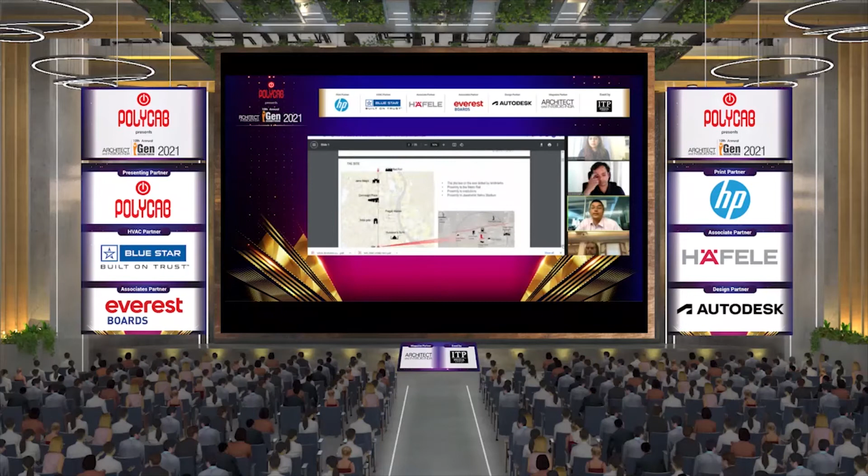So just hold on a second. This was named after the ex-Prime Minister - it's called Atal Akshay Urja Bhavan, spread across 2.76 acres. They wanted, like any other client, an iconic landmark. And the brief given to us, because it was the renewable energy headquarters, was to achieve net zero and go beyond it. The site was strategically located - it was wonderful to bag a project in the capital of this country, dotted by landmarks, in proximity to the metro rail, to institutions, and very close to the Jawaharlal Nehru Stadium.

So we hypothetically created an axis where it stood, and we did a SWOT analysis of the site. The unfortunate part was it was along the north-south axis, so there was a huge western orientation that we had to tackle. We had a very small sliver of the site hugging the main road, but we had a subsidiary road on the southern side. Great location though, with proximity to public transport, so I could really do wonders using public transport and thereby reducing the parking for the facility. The threats, of course, in Delhi were pollution and security, being a government building. An opportunity was that this was the second net zero building in Delhi - the first was a net zero building, and this would be net zero plus if it becomes energy positive, and we are confident that we will achieve it.

It will be the first one of its kind in Delhi.

What we did as a simple strategy was, how did we evolve the planning. So we wanted to celebrate the frontage, we wanted to create a public edge. What we then did is we established the footprint, and then we created an atrium.

There were two distinct departments sitting in this space. We got the building tilted to the geometry, which gave a great northeast light, and we wanted to enhance the entry experience rather than having a right angle entry—we wanted an angular entry. Then we shielded the west by introducing the service core.

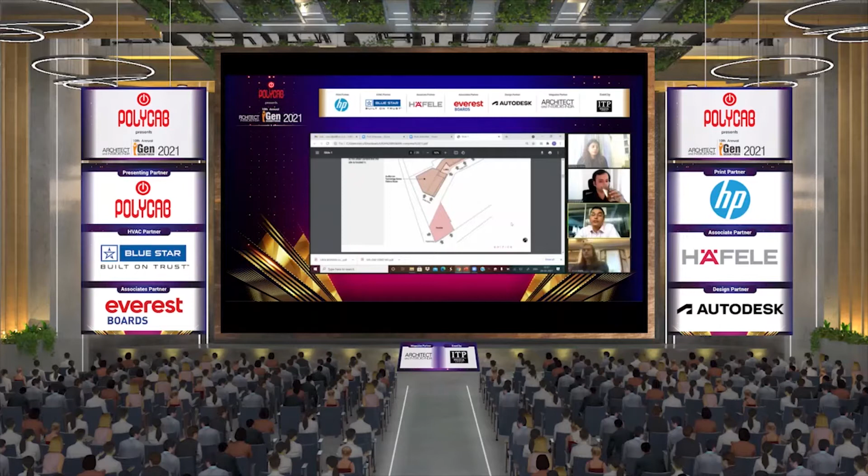We also created a public edge, a pavilion to showcase what the Ministry of Renewable Energy was doing on a week-on-week or month-on-month basis. The ground floor was the double height auditorium, and we took the canteen and gym on the first level.

The second level, we took the training facilities, that's your classrooms. They also had a requirement for guest houses. So the canteen spread across 2 floors.

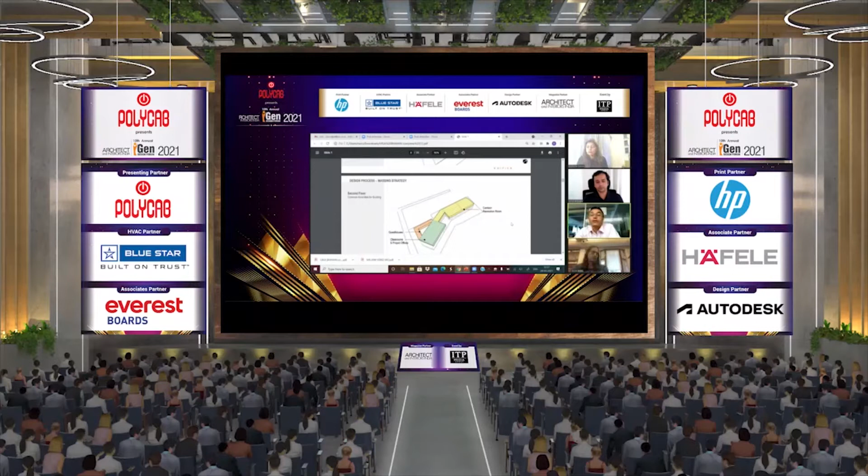Then we established the main service core, the circulation cores, which came as a vertical mass in the hinge in the center. This being in Delhi, we had to take care of the western facade.

So we created the core, the toilet blocks, the AHUs, etc., as a screen. But we also had to celebrate the wind movement there, so we created voids which allowed for light and ventilation, and allowed some cross ventilation for the atrium we had created.

Then we had these typical floors from 3rd to 6th floors, which had the grades in the government—A, B, and C grade offices. These were all typical floors.

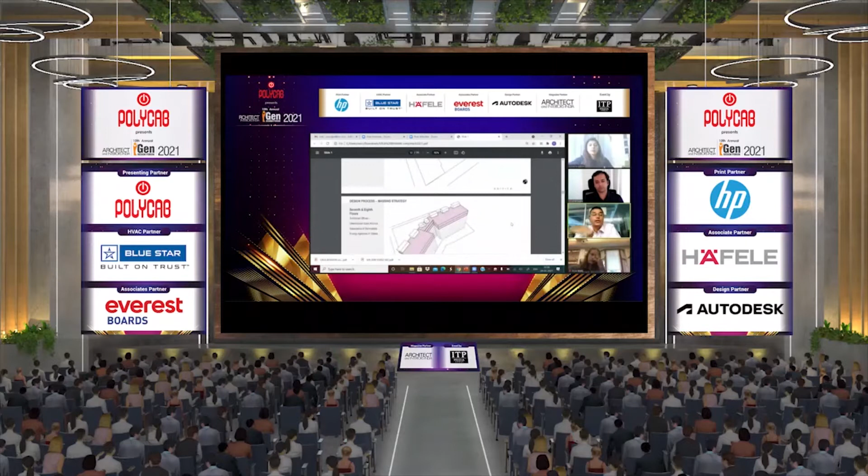The topmost floor was reserved for the minister. One side was the minister's, and the other side was for the Minister of State. So that was reserved for the top level.

What we then did as a strategy was, since we had to rely on renewable energy, we went in for solar panels, which we housed on the terrace floor on top. So this was a very simple strategy.

When we presented to the ministry, we wanted to make it completely idiot-proof. And that's how we showed the evolution of the design.

Then we had to think about the facade strategy. Since there was no building on the southern side in front, we were falling short of area for the solar panels, so we introduced a vertical solar strategy as well, which was called the solar well or the solar wall.

What it did was it took care of my energy needs, the solar wall as well as the rooftop strategy. And that was it—it had to belong to Delhi.

Therefore it had to belong to that circle, so we had to use materials sourced from in and around North India. Sandstone was used as a facade strategy, and the solar panels, you see them on top.

What we did for the eastern facade was we had to take care of the morning heat. So we had glazing, and then we introduced a kind of screen in front on which we started growing creepers, and therefore it kept the heat ingress low.

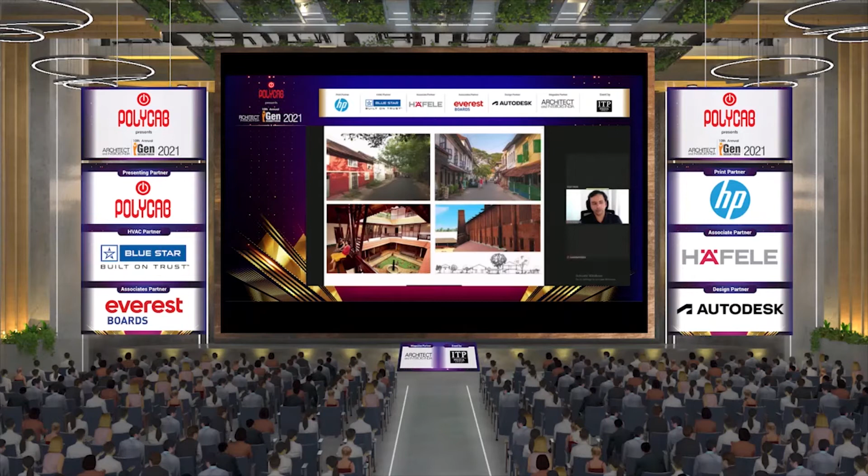So even if we look at these images and you can see the greenery, I would say the older architecture, the older built environments in these spaces all evolved in the shade of the trees. There was nothing tall. They worked with terracotta, mangalore tiles, brick, streets, courtyards - everything within the shade of the trees, ultimately building an environment that was sympathetic to the climate, and to the social patterns of that region.

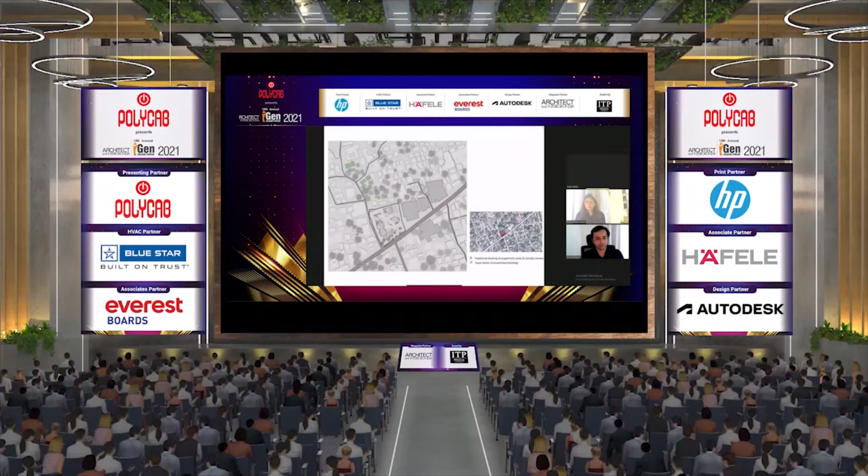So you're actually starting to see that all of the accumulated intelligence of the past, which are these loosely formed networks that allow sun and air and in-between spaces, are all now giving way to this kind of more generic concentrated super block. So the idea is can we look at the building program and start to, in essence, learn from the past and project into the future.

Now, all of this cannot happen in a vacuum. It requires a situation where all the stakeholders are also open to dialogue. The project is for Mathrubhumi, a very well-known media communications network. They do radio, they have an entertainment channel, they publish, they have an online presence.

So what they were basically looking to do in this project was to consolidate their global network - all of Kerala and Dubai, their sales and management structure - into a single site, whilst also keeping their local operations in Cochin, which requires a heavy daily interface with the city. So it's broken up into two parts: there's something which requires daily interface with the city, and there's something which is more of an oversight over their global program.

So what we did was we managed to isolate those two programs, and after numerous conversations with the client - seeing as ultimately how they're a communications company, and also the client is a member of parliament doing a lot of social work in this area - we distributed those areas in such a way that we kept their core daily program on the ground, and their global program into the trees. And what that did was it opened up a tremendous amount of...

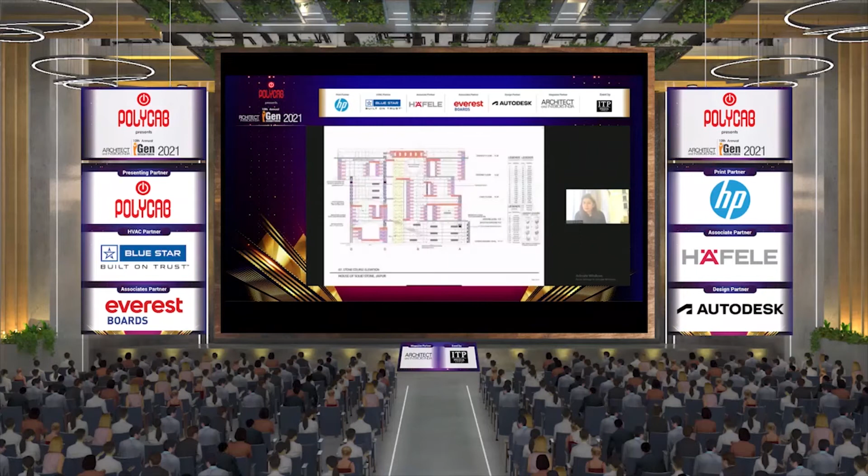I don't think place and access to technology is the issue here. In most places in India you're going to find very sophisticated construction technologies, but perhaps their application to different building types has been consigned to history simply because we haven't applied ourselves to the subject. So whether you're working with stones or bricks, rammed earth, bamboo or wood, it's really about taking global information networks and engineering from all across the world, but applying it to very robust local skill sets and local materials.

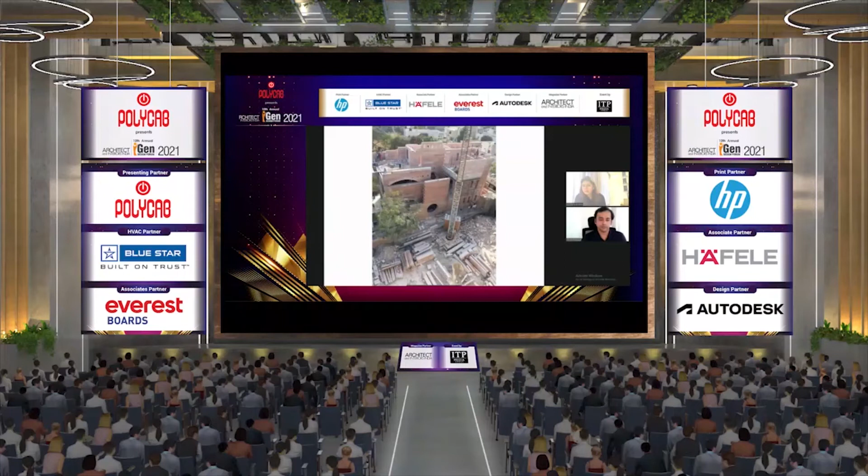And I think that's the issue of sustainability, Sumisha. Clients keep asking me about LEED ratings and stuff, and I always dismiss them because how do you evaluate the sustainability of simple construction with rammed earth and bamboo—passive design and core material components with pretty much zero carbon footprint—when all we're trying to do is apply metrics? I think this country has a history of immensely sustainable design, and it's our responsibility to learn from it. How we can apply it, whether it echoes the past or projects into the future.

A simple example: we've built a house with one material. It's a basement plus 3-level house built in solid stone, with the local village teams. The quarry is 15 minutes away. The stones are unprocessed—we've gone back to splitting stones instead of using those massive gang saws which eliminate all texture. But the reason we even chanced upon this process is for economic reasons. Building a house in solid stone in Rajasthan is actually cheaper than doing it in a concrete frame, brick infill, stone claddings, plastering, chasing, painting, and false ceilings. Here we have cavity walls, space for services, no applied textures, no false ceilings—everything built and cut by hand. You get a carbon footprint that is a fraction of what we'd call a conventional structure, with temperature performance of 8 to 10 degree differences between outside and inside—calling upon the past, but engineering it for the future.

Absolutely agree with you. In fact, I would love to see more and more of such projects, such architecture in our cities, because as you rightly pointed out, yes, a lot of people are building second homes which are very contextual, very traditional. People are looking at alternatives, people are going back to their roots. But I think our cities still need this kind of architecture within them too. Do you agree with me?

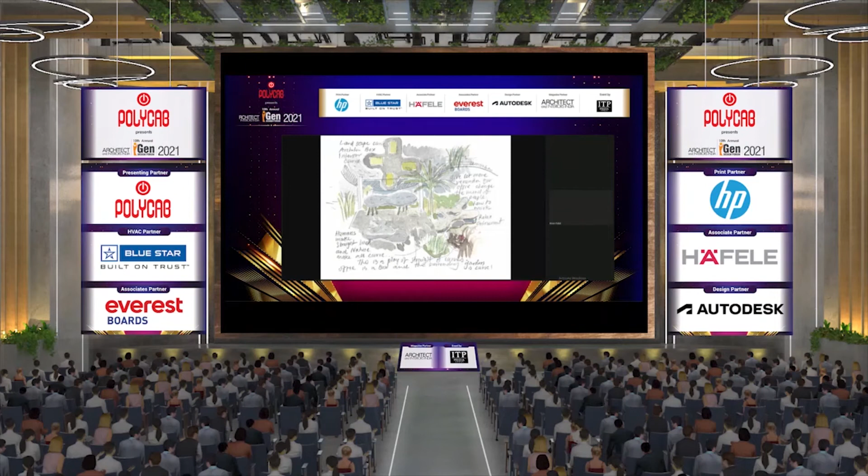In the sketch, you can see the 4 yellow cubes. Two are the office cabins for the directors, one is a conference room, and one area is for the staff to work on. So this is the office.

You can see one of the covered cubes, and on the right hand side is the open veranda kind of space. We created this curved form for the roof because we really wanted to not have a very powerful impact of architectural form, and wanted more focus on the landscaping. We thought we'd create the edges in such a way that it's least hurtful to the eyes - that's how the curved format of the roof came, with all white steel pillars and frameless glass all around.

That was incredible, Hiren. Yeah, so I think it's always good to go back and see how people use it. As a designer, you design something, you have lots of ideas, but you have to go back to the office and see, and you actually discover a lot more things.

Now these clients are very simple people, and I said, actually, don't become so greedy - keep your office like your office. Why don't you have an art show with some upcoming artists to showcase their work in your place? It will be wonderful, and I think we are also going to take that initiative.

This is quite early images. Now the garden around has completely grown so beautiful, and you are almost living into a forest kind of space. Surprisingly, they say whoever comes to our office for a 15-20 minute meeting ends up staying 1.5 to 2 hours because they love to be at this place, and everybody feels so calm to work here.

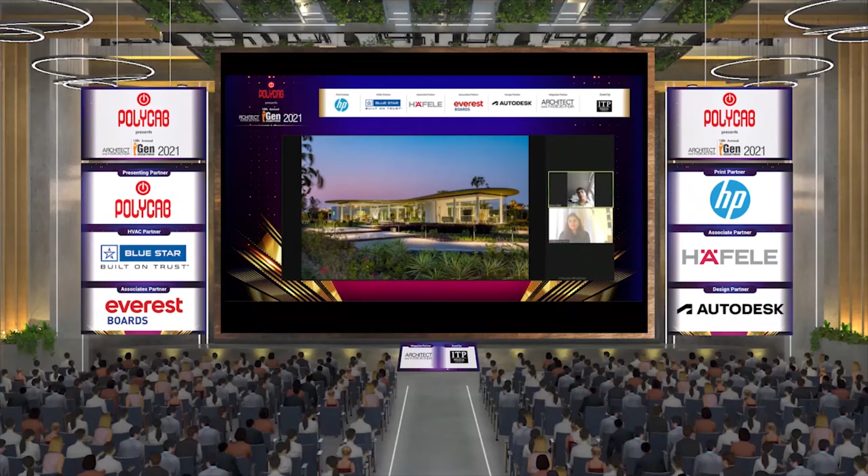Yeah, the idea was to create lots of beautiful garden around the building, which complements the building itself. So now, if I go back and see this, I really want... I mean, there is still an architect's mind working. I'm still in my next journey of architecture. I really want architecture without architecture, frankly speaking.

I'm just wondering, if I compare this, the water features and the pebbles here, with the water stream in the Himalayas, I think there is an ego of an architect. I really want to erase that and come out with architecture which is so subtle, and it's very difficult to find that kind of thing.

That kind of philosophy of design, I'm designing for my own learning. But yeah, it's a process, and one can maybe fail, but it's always good to just keep on working, and you discover new benchmarks in your life.

Next one, please. Yeah, so you see from inside also we have furniture pieces which have free form. It's all customized with local carpenters, nothing has been imported or something like that. Even the client would have afforded that, but we thought it would be good to have simple furniture. And if you see, the flooring is also very subtle and simple, with concrete flooring.

This is the conference room, and now the surrounding landscaping has already grown. I recently visited, and you don't see the movement all around the plot because the peripheral plantation has grown almost double than what you see now.

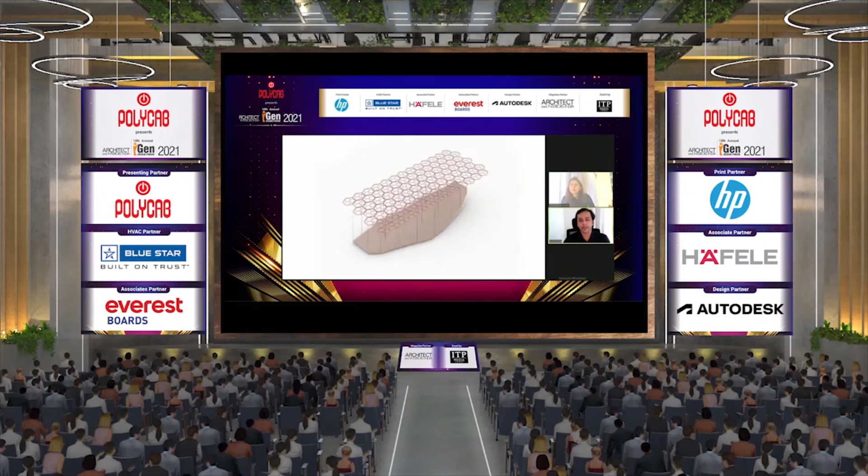So the first thing we did was look at the original contours of the site, and restructured the site again to the original contours. On this, we overlaid the hexagonal grid. We wanted to have a primary and secondary grid to control the architectural geometry. So it was a system overlaid on the entire site.

Then further, this inclined step - because the client has anyway cut the site, we are not reconstructing it by filling the earth back, because this would be very counterproductive. The architecture of the site is actually coming from the initial topography. So this inclined area is where the villas are sitting, around 8 or 9 villas nested in the inclined zone.

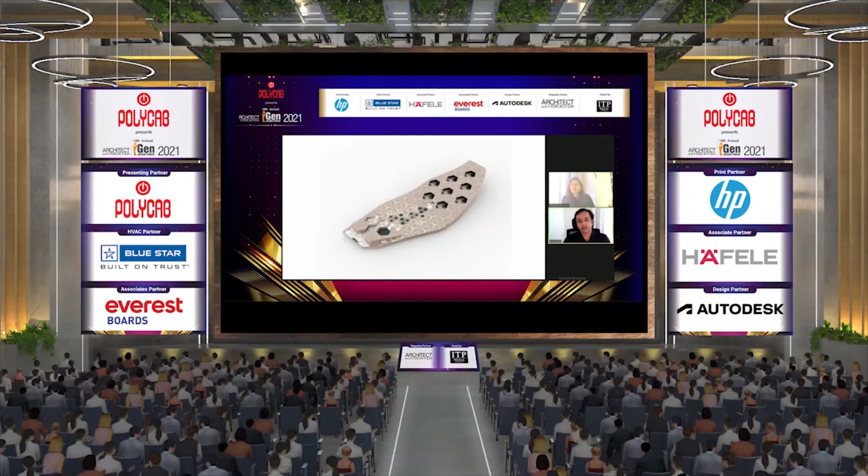At the entrance, we have 2 buildings - the reception plus all-day dining, and the gym cum spa. So this becomes the entire project. The idea here was to re-establish the site contours as they were, without actually filling.

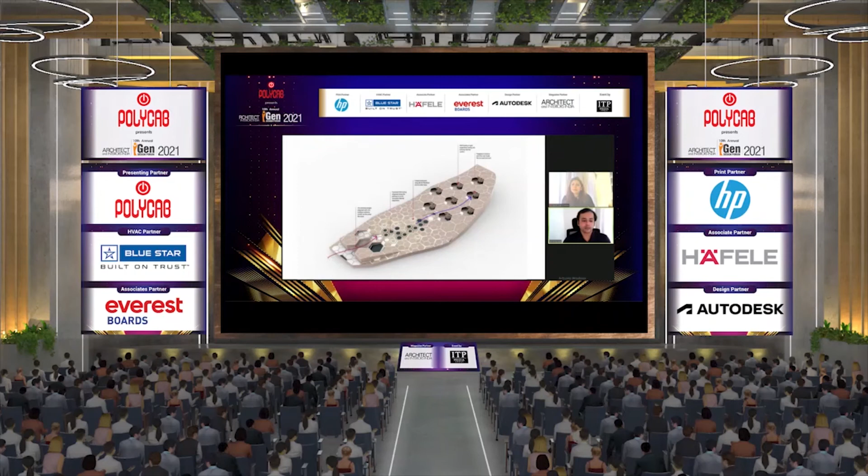Also, because it's in Udaipur, we created something which for us is really this formless form. Then there's the secondary measure of shading using jalis on top of it. Now we were lucky in one case that the wind was actually coming directly from the north direction.

So these 2 entrance buildings are actually used to channelize the wind. They create air channels, which when flowing over the water bodies, bring cool air over the villas. The inclination of the site actually accelerates the wind speed and throws the wind more into the villas, creating a night purge and fresh air inside.

Now given the heat gain of the building, every villa is nested inside the landscape. There's basically no form in this architecture - the idea is that nature becomes the form, and earth cooling was something we were looking at.

Earth cooling, not mechanical cooling, but cooling the villas by placing them inside the earth, nesting them in the earth. As we all know, the ground temperature is always lower than the outside temperature.

Another thing is that all these villas look towards the site view, where the mountain peaks are. This is how these 8-9 villas have been spread around the site.

So this is one of the newer projects in the office which I want to show. This is a post-COVID design - we were looking at work from destination.

So the villa sizes are 150 square meters. The idea is that a person, if you give him a 42 square meter room like a Hilton would be, he cannot stay there for long.

So it's really a home away from home, that's why there's a huge outdoor area. And the depth of the rooms is such that all the villas inside are 8 meters deep, so you get enough natural light inside, but shaded light, because in Udaipur we don't want to shoot up the electricity and cooling loads. So this was one of the strategies for this.

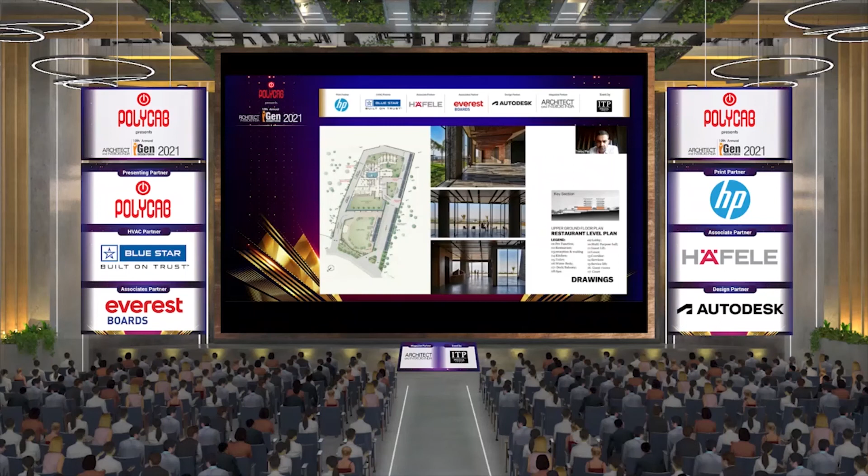At the first floor, this is the entrance lobby and the spaces inside look towards the outside, opening into a very large terrace space. And this is the hotel on the top.

The entire organic structure of these rooms was derived from the organic city of Nasik. So if you see, no room is in a straight line. There are two courtyards at the back, one in the front, one in the back.

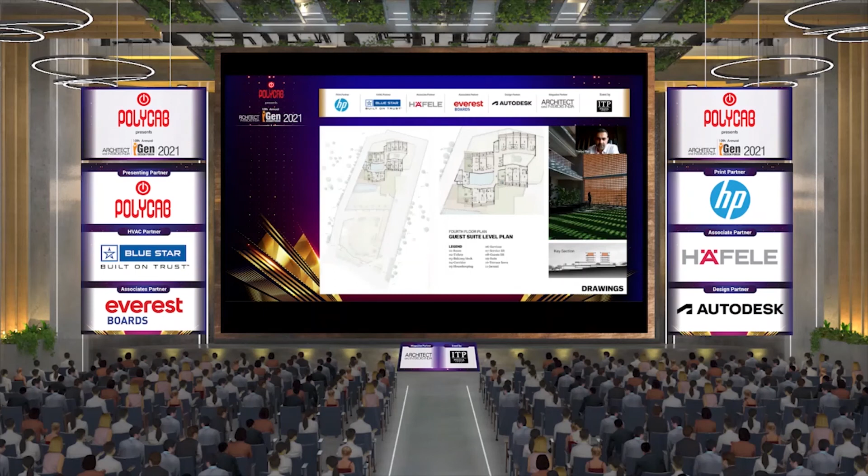The entire circulation internally within the hotel is organic, so that one does not feel it's a box-like structure as most hotels are. This is a hotel where more than 50% of the spaces are naturally ventilated and naturally cooled, and all spaces have ample daylight throughout the day. So the energy required to run this hotel is much lower than most hotels.

This is one of the atrium spaces which is naturally ventilated from the top, and all these corridors are naturally ventilated and naturally lit. So 50% of the area is non-air conditioned space within this resort hotel of 63 rooms.

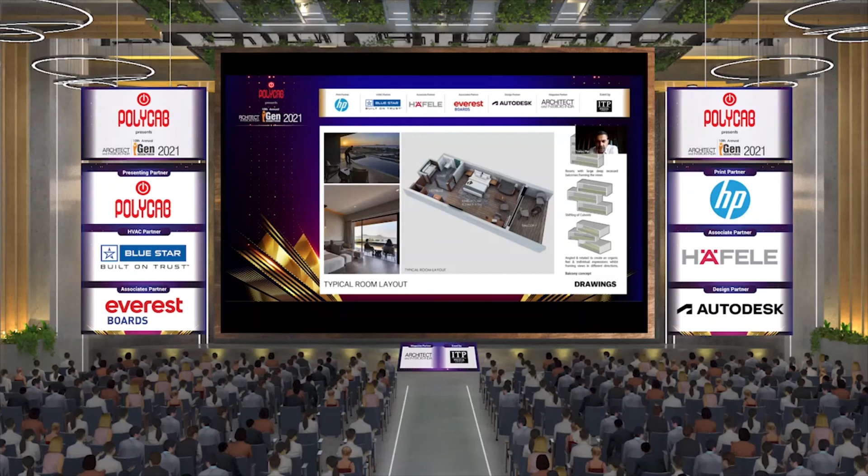This is a cross section showing various green spaces generated within the hotel design, and that's a longitudinal section showing the hotel gradually stepping up and looking out. These are the rooms, very simple rooms, opening out into large balconies that frame the outdoor spaces to the inside spaces.

This very briefly shows the circulation of hot air and cool air within the entire hotel. It's all naturally ventilated, and the atrium roofs have solar panels to generate energy. 50% of the walls of this hotel are made in black basalt stone, which is available on the site itself. So again, in terms of material and climate, the entire hotel is very contextual to its surroundings.

This is the large garden space at the banquet level. And when you're in the banquet, you have a 24 feet high space looking out towards the garden. This is the entry to the hotel, and this is the lobby, the pre-lobby area where you enter from.

These are the restaurant and bar opening into this large terrace space, and each of these volumes looks out towards the view at every level. This is the large restaurant garden space with a shallow pool at the end.

This is the spiral staircase that connects the banquet level to the restaurant level. There are two atrium spaces which are naturally ventilated, as you saw in the plan. This is the second one, and this is the first one that comes earlier in the plan when you're walking through the hotel. All of this is naturally ventilated.

These are clay tiles on the right-hand side, which are open, and this is the pool level. Each one of these hotel floors is twisted at a different angle, creating a very sculptural effect for the hotel. At the same time, each one of these rooms overlooks different angle views of the outside.

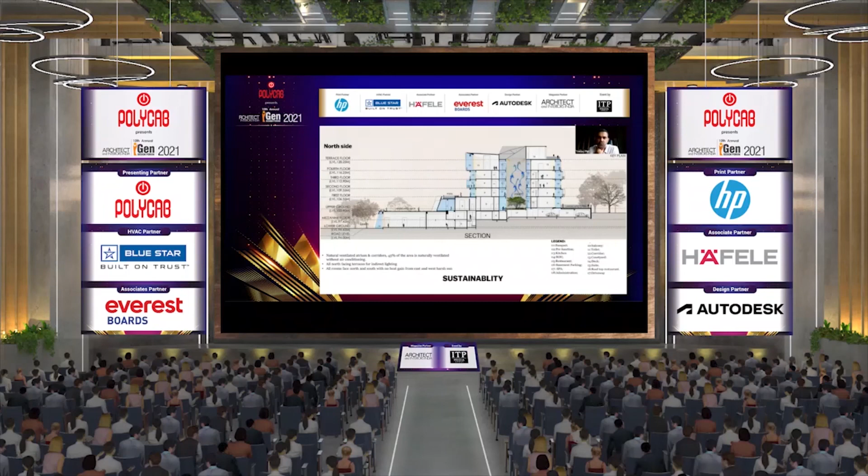In addition to this, 50% of the energy consumption of the hotel is derived from solar panels on top of the roof, as well as the parking spaces. So that's all the spaces where the solar panels have been placed. So the entire operation of running this hotel itself is very low.

This is the basalt stone that is used for 50% of the walls. And this is a very brief video that just takes one through these main spaces of the hotel and the kind of view that it has for all the residents.

So basically, this is the way forward. Designing for the future is this: that you take cognizance of the site, of the climate, you reduce the heat gain into the building, you maximize on natural daylight, and you reduce the energy consumption. This is the way forward.

That sounds fantastic, Sanjay. I couldn't stop ogling at it, and I can't wait to visit this project as well. It just looks fantastic. But tell me, when you think about the elements that you keep in mind while designing spaces, what are those 5 elements that constantly are like the precursors to your design?

First thing is being contextual, with respect to the site and with respect to the location. And then it is the sun path - how do you reduce the heat gain into the building? And how do you facilitate natural light and natural ventilation in all parts of the building as far as possible? These are some of the key factors that govern the design for any project, whether it's a house or a large township.